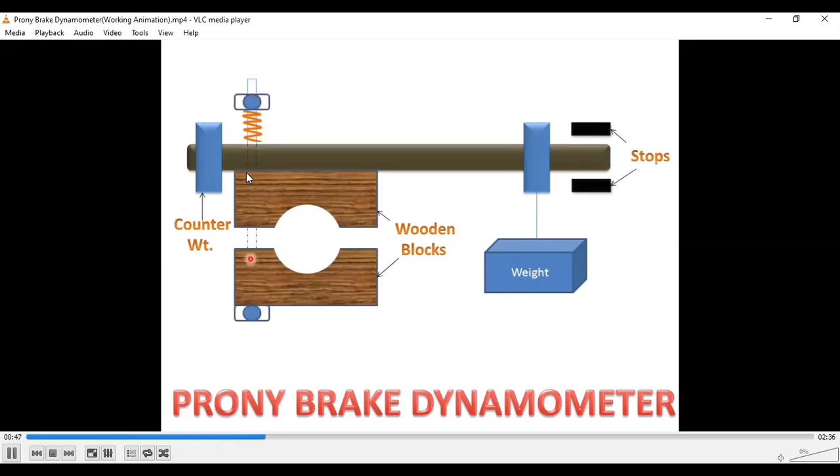So these are the two wooden blocks, and this is the lever, and this is the counterweight just to balance this lever. Both sides the weight will be applied just to balance this lever. Or you can fix this end and apply the weight at the other end. These are the two stops just to stop this lever movement, and this is the rope which is tied between the lever and the wooden blocks. The two ropes will be tied using the normal nut arrangements.

So here is where your flywheel is going to rotate. This is the pulley, or you can call it the flywheel, which will be rotating because of the engine. Now what you have to do is increase the dead weights at the other end so that it applies the braking action. The lever will move upward and downward and apply the braking action using this wooden block. Once it applies the braking action, this pulley will stop. Then only you can note down the weight applied here.

So that is what is shown in the animation. You can see the animation.

Once it is done, you have to note down the weight applied. Multiply this weight with the gravitational force 9.81, you will get it in terms of Newton, and the perpendicular distance from this end to this end, that is L, will give you the torque T. Then using this torque, 2 pi N T divided by 60 will give you the power in terms of watt.

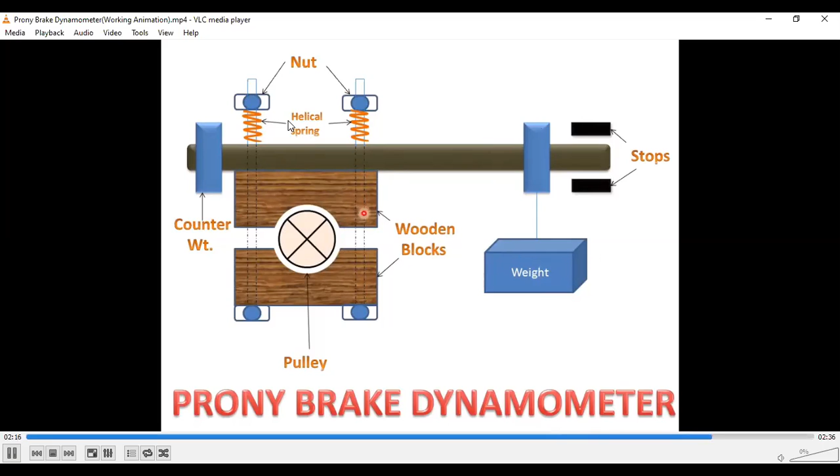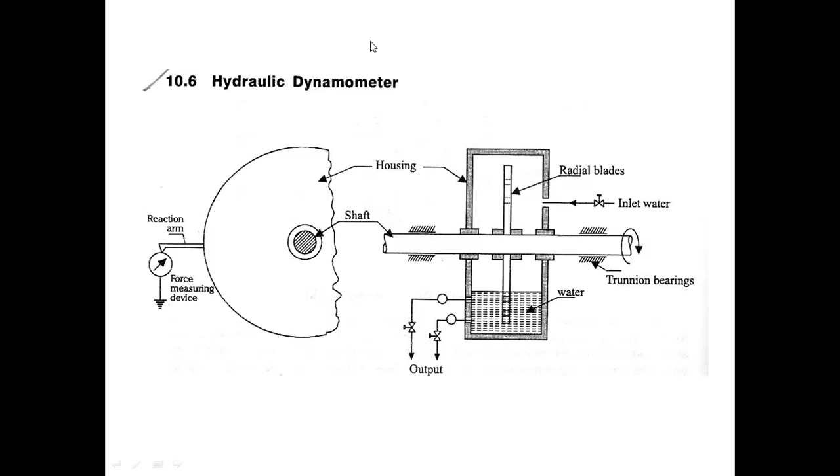Like applying the brake, how you applied the brake in the earlier dynamometer, some other arrangement will be made here to apply the brake to this housing just to stop it. Again, once it is stopped, the remaining process is the same. Whatever force is generated to stop that housing will be noted, and from that you can easily calculate the power from the rotating shaft. That is the rope brake dynamometer.

Just to avoid that, the cooling water arrangement will be kept in between the rope and the flywheel. So this flywheel will be stopped. Once this flywheel is stopped, using the spring balance arrangement, you can note down the reading, and then you can calculate the power.

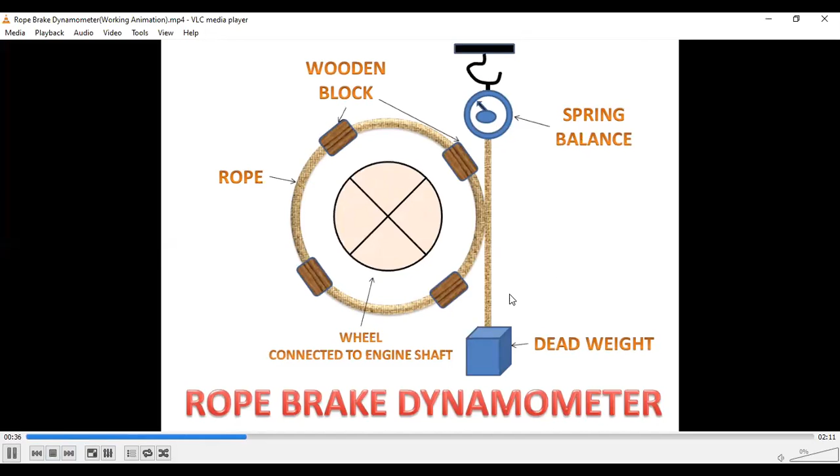Then what will happen? Using this dead weight arrangement, you will bring this rope in contact with the rotating flywheel, which means you will increase the dead weight. That time it will stop the rotating flywheel.

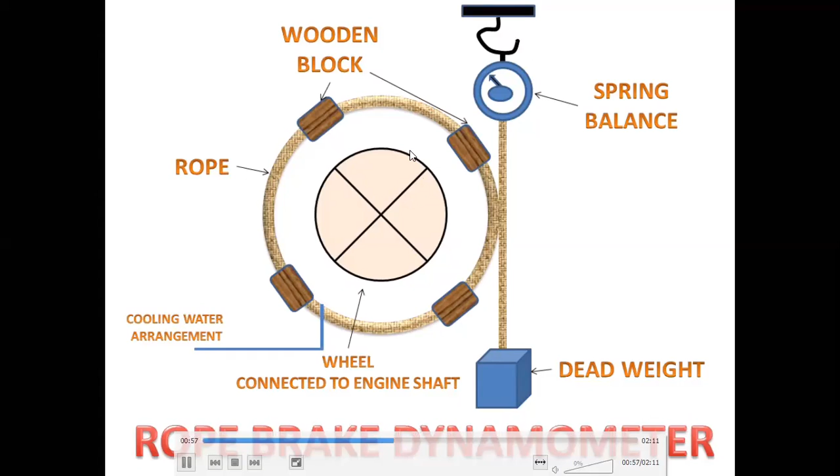Because of the contact between rope and flywheel, some amount of energy will be generated. When something is rotating and you suddenly make it stop, some amount of heat or temperature will be generated. Just to avoid that, cooling water arrangement is kept in between these two.

After that, using this spring balance arrangement, when you apply the dead weight, the spring balance will show you some reading. Using that reading, you can measure the torque, and in turn measure the power, using the same formula, 2 pi NT divided by 60, to measure the power of this rotating shaft.

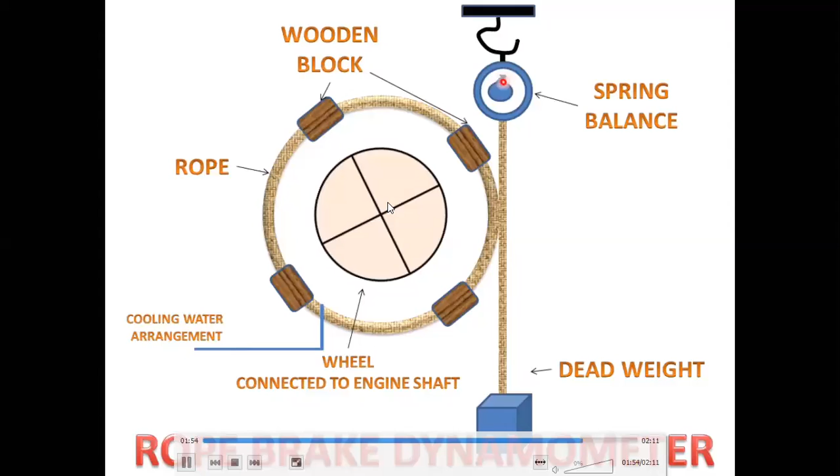When you apply the dead weight, this rope will come in contact with this wheel, which will stop. So this is the animation about your rope brake dynamometer.

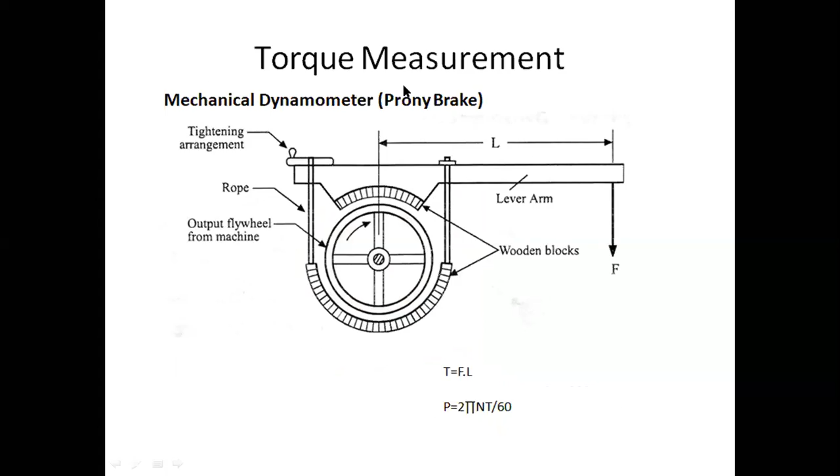This is about torque measurement, which has 3 types: one is mechanical dynamometer, that is Prony brake dynamometer; second is hydraulic dynamometer; third is rope brake dynamometer. This is about torque measurement, and next is temperature measurement.

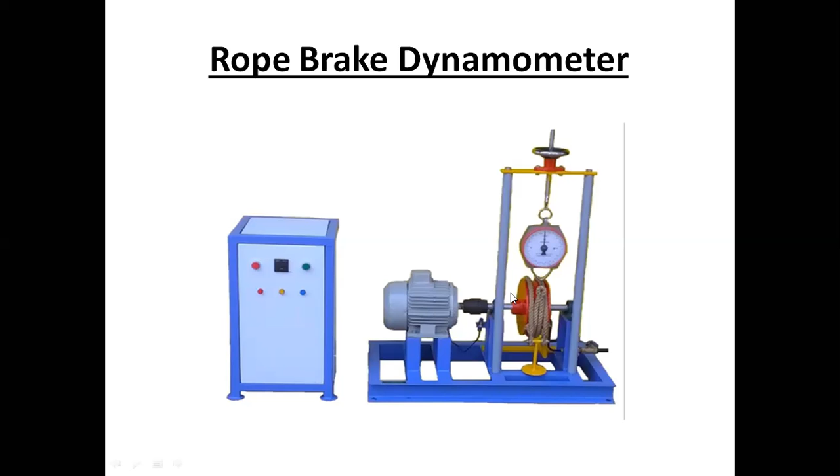And next is the temperature measurement. So those are the 3 types used for measuring torque. Next is temperature measurement. There are various laws of temperature measurement, like law of thermocouple, law of intermediate temperatures. All those laws we'll see.

But before that, there is one more thing called optical pyrometer. How this optical pyrometer is going to work, the working principle of optical pyrometer - what will happen in this temperature measurement? This is the heated source, which will continuously send heated radiations.

These heated radiations will pass through this objective lens, and they are made to fall on this filament. This filament, based on the temperature range, the color is going to change. Say if it is 1800 to 1900 degrees Celsius, this color will be red.

If it is 1500 to 1200, this color will be orange. If it is 800 to 1000, this color may be green. Like this, based on the temperature range, this filament color is going to change.

Usually what they will do is set some temperature range to this filament - if this temperature and the maximum temperature are the same, you will not see the filament. I think that image is missing here, I will show that in the next class.

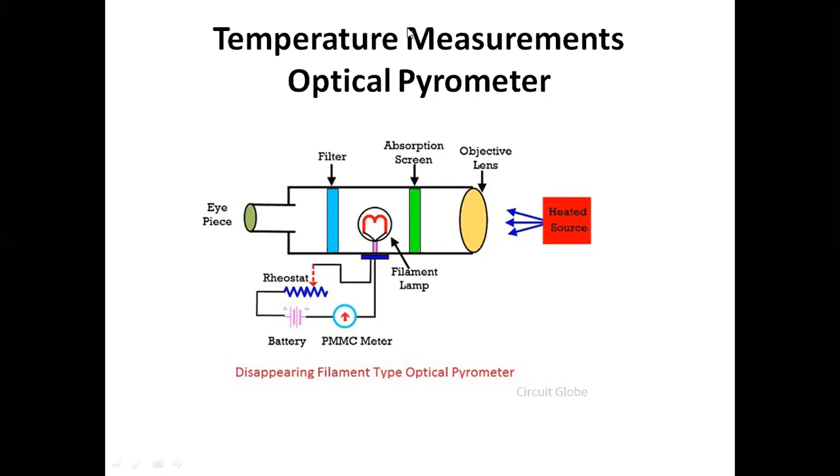This filter is kept just to avoid harmful rays to the human eyes. So this is how this optical pyrometer works. This is about temperature measurement. There are many types of temperature measurement devices which we will see in the coming classes.